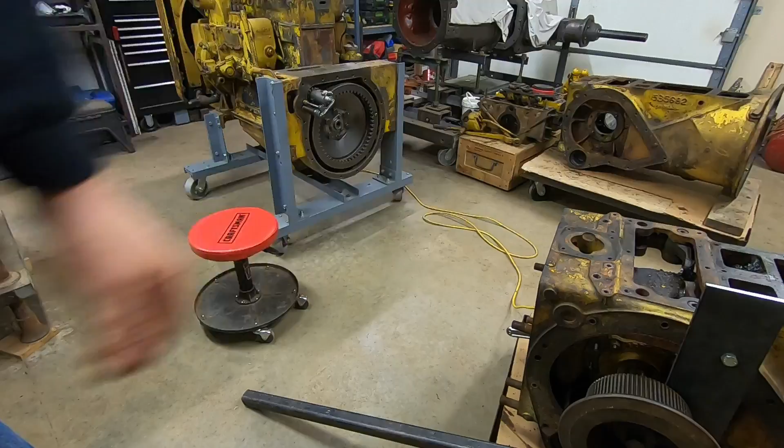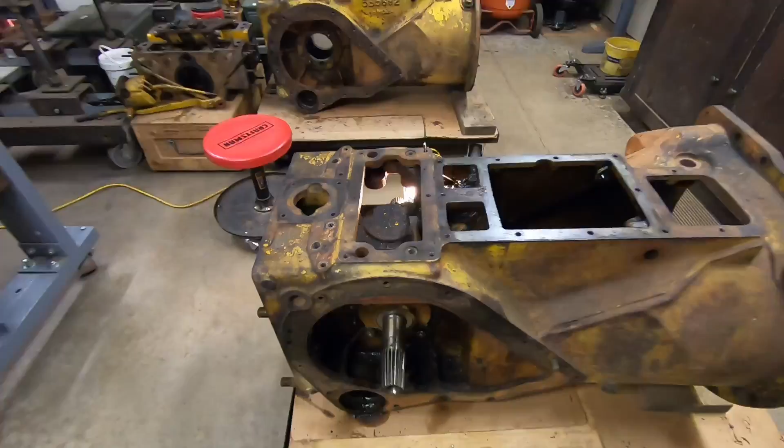Let's pull a bevel gear. So the first thing we have to do is loosen each bearing cap. So we've got 4 studs, 4 nuts, 4 fold over locks, times 2. Same setup on the other side. I couldn't have made that more perfect if I would have designed it myself.

And I've already taken the time to flatten all the lock tabs off camera, but honestly, props to the last person that was in here and did this assembly. Every one of these locks is positioned just perfectly with the tab up against a hard stop, preventing any counterclockwise rotation at all. That one's perfect. That one's as it should be. That one is exactly as it should be.

I almost feel bad taking this apart because it's just so right, you know. Oh, anyway, I'm rambling here. Seriously, it's like taking paint thinner to a canvas. Oh. All right, I'm over it.

All right, that's all of them. So what we want to do now is loosen up the bearing caps on both sides and get the shim packs out from under them. Just like we did with the bevel pinion, we want to get those shims out of there, make sure we don't damage them in any way.

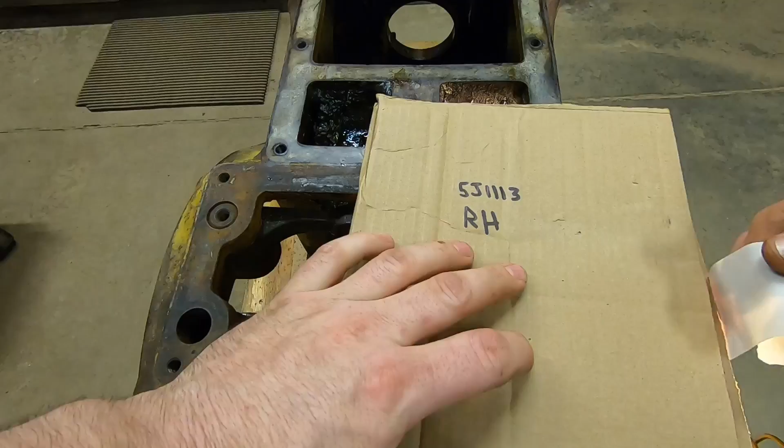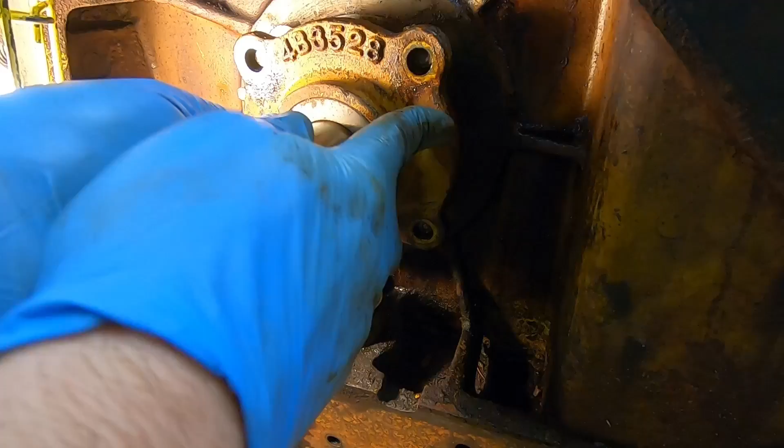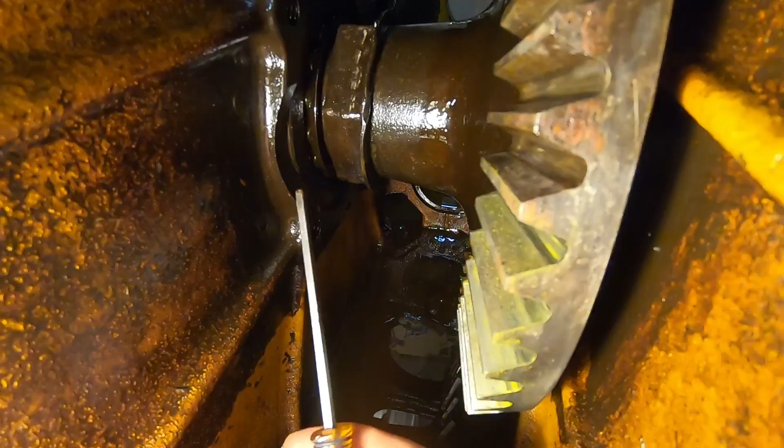So we put both bearing caps back on after pulling the shims. Why is that? Well, I still need to have this bevel gear shaft supported, but I didn't put them back on fully. I left a little bit of a gap behind this one because you want a fair amount of end play on that shaft for what comes next. And that is pulling this left side bearing.

So we have a bunch of things working against us here. Not only is it a press fit on the shaft, but it's flat up against the face of this nut. Now this nut has to come off the shaft, the lock has to come off the shaft, and the bevel gear has to be pressed off the shaft in this direction. So the only way we can get that bearing off without destroying it is to get a puller behind the inner race. And that's impossible to do with everything stacked up so tightly in there.

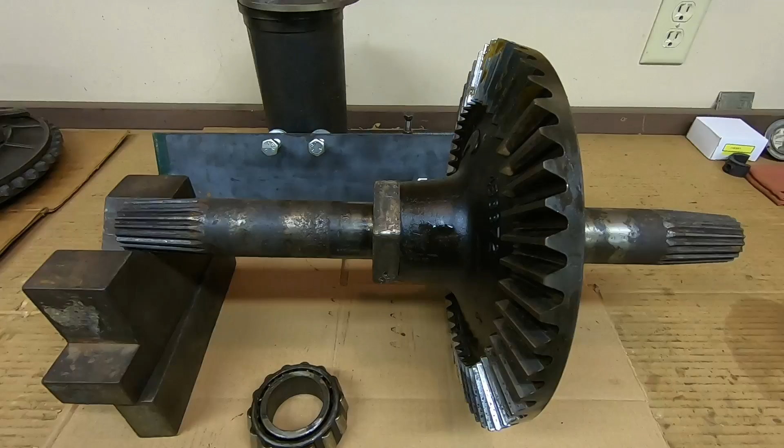So how do we solve that problem? My solution is sitting on the bench up there. This is the bevel gear and shaft that I pulled out of old 2115. So we have that bearing, like I said, pressed tight up against the face of this nut. So we need to get that nut loosened anyway to get the gear pulled off. So what I'm going to do is go in there and start backing this nut off.

And we're going to go 1 to 2 turns because we're going to use it to start pushing on this bearing. So as we start running that nut off, it's going to drift the bearing out somewhat. Once we get about 2 turns on it, I'll run it back in. And that should give us just enough of a gap in there to get a puller behind that bearing and slide it the rest of the way off that shaft.

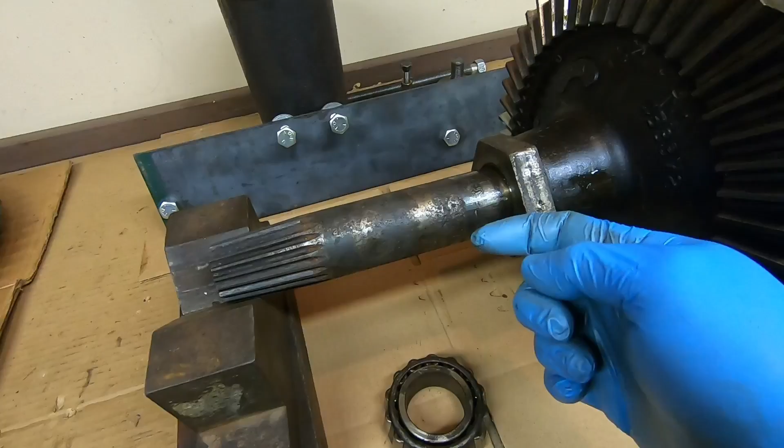Sounds simple enough, right? Well, unfortunately, that brings us to our next problem. And that is, how do you hold this shaft from turning while you're trying to loosen that nut and exert enough force on it to actually start pushing on this bearing? This is a 3-inch nut, and they're typically run on in excess of several hundred pound-feet of force. So, again, my next solution, we're going to use the steering clutch hub.

We have this nice splined end out here, and you don't want to just put a pipe wrench on those splines, but I've seen it happen. But we can just use the spline fit inside that hub to go on there and hold it. We don't have to reinvent the wheel here. Cat already built it for us. But we're going to need to use this too.

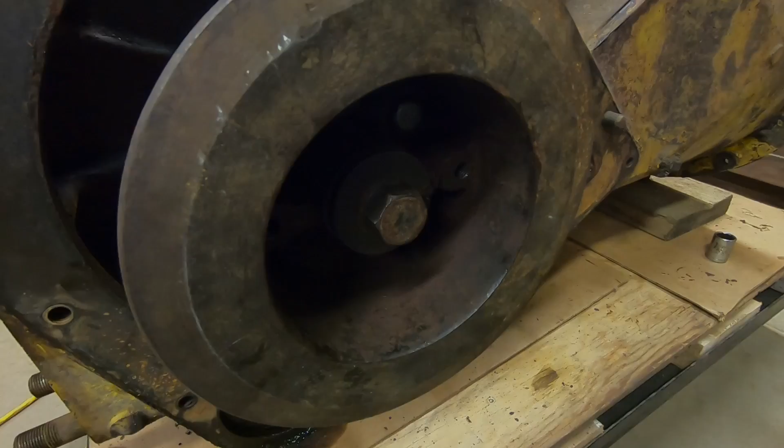Okay, so between the steering clutch hub, that flat piece of steel, and a few 1/2-inch bolts, we've essentially bolted that whole bevel gear shaft to the case. That thing's not going to move. We can do whatever we want to it now. So we're ready to loosen that nut.

Like I said, though, that's a 3-inch nut. And the trouble is, if you put a modern wrench on there, by the time you get up to like a 3-inch wrench, the head of that thing is going to be like 1.5 inches wide, and you've only got half of that to work with.

That's like 3/4 of an inch. You got that bearing right there. You have the tapered hub of the gear on the other side. That wrench isn't going to fit. So a cheap 3-inch wrench is like $200. An expensive one's like $500. And that's a little bit too much for me to buy just to grind half of the head off and then hope I don't spread it.

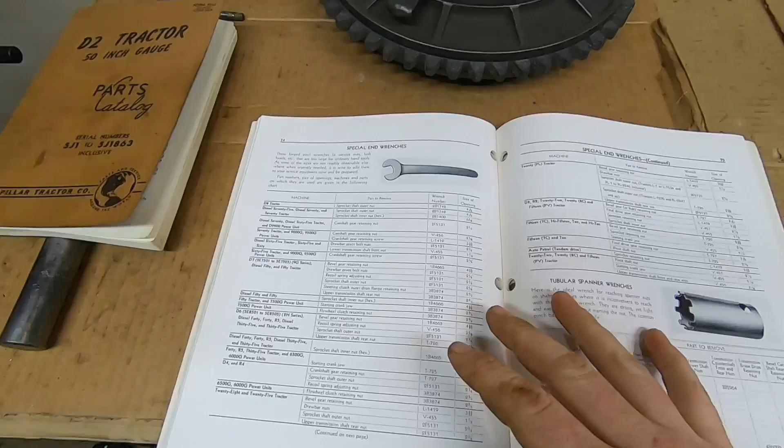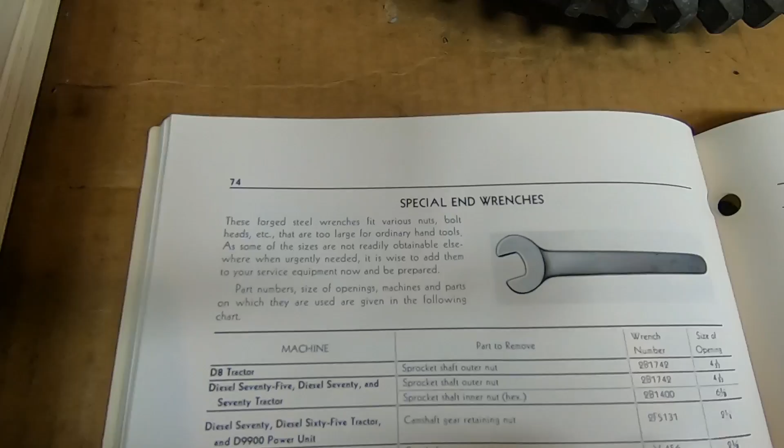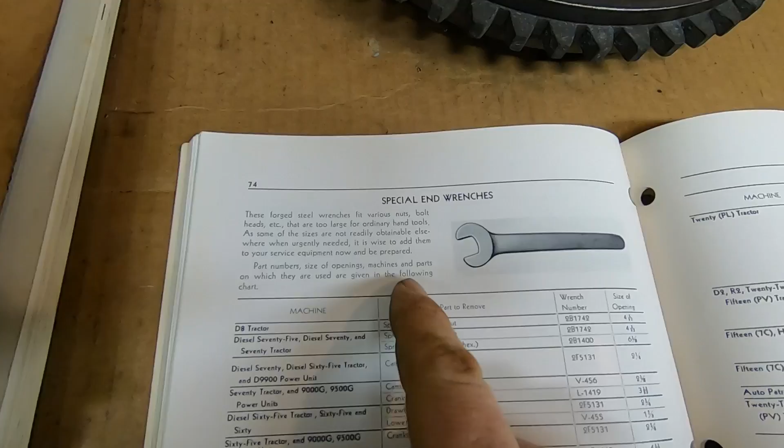So, well, we'll go back into the Caterpillar Service Tools book. I swear I shouldn't even buy books like this because for me it's just torment. They have a neat section here, special end wrenches. You can see the old style construction. We'll just read quickly here. These forged steel wrenches fit various nuts, bolt heads, etc. that are too large for ordinary hand tools. As some of the sizes are not readily obtainable elsewhere when urgently needed, tell me about it, it is wise to add them to your service equipment now and be prepared. Would if I could. Part numbers, size of openings, machines, and parts on which they are used are given in the following chart. Oh my God, I can just read through this stuff for hours, but we'll go over here.

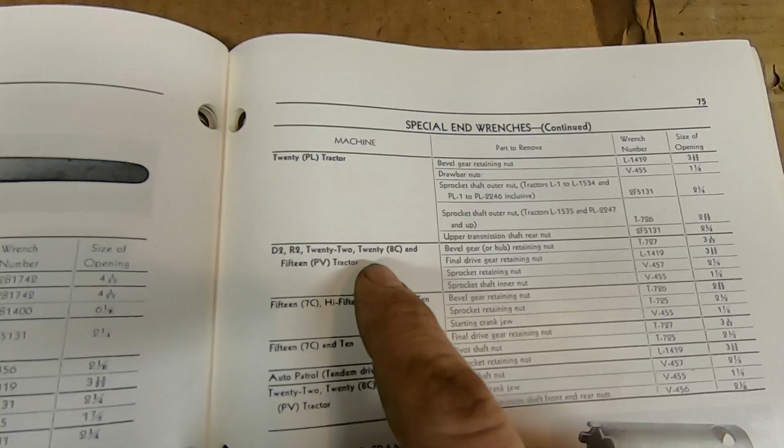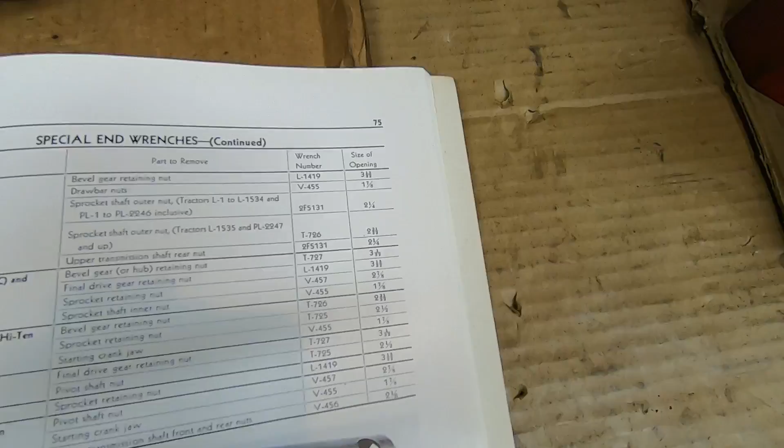You see D2, R2, 22, 8C20, and PV15 tractor, bevel gear or hub retaining nut, wrench number L-1419, size of opening 3 1/32. That's just another example of how life just isn't fair these days. If I could just go buy those things, I'd be like, I want one of those, I'm gonna buy 2 of those, until the list is done, I'd do it too. But so what do?

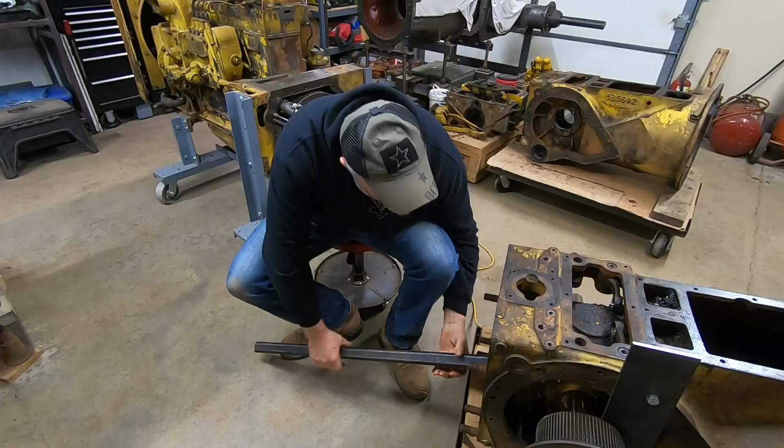Well, we can't fit a modern wrench on there, but the old monkey wrench will work. Look at this, just like it was made for it. Well, that's what we're doing. Did I also forget to mention that it may, small chance, involve the use of a 4-foot long cheater pipe as well? Tip away. Moves.

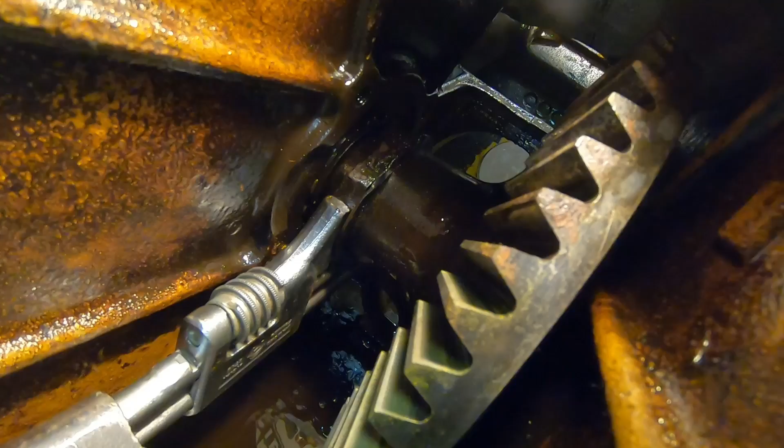Okay, the lock is loose, so we're moving things. From time to time, I'll loosen the bolts on my holding fixture, and I'll come around here and make sure I still got end play on that shaft. Good there. Reason being, you're drifting that bearing outward and taking up that end play, and you don't want to come out so far that you start binding heavily into that retainer. You'll break the ears off, so just something to be mindful of.

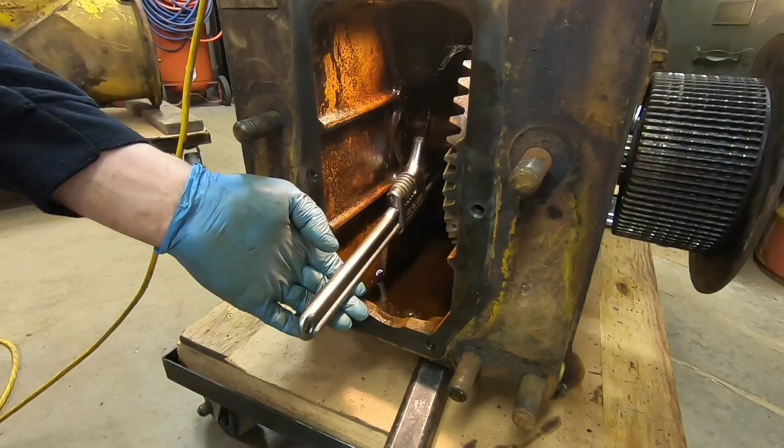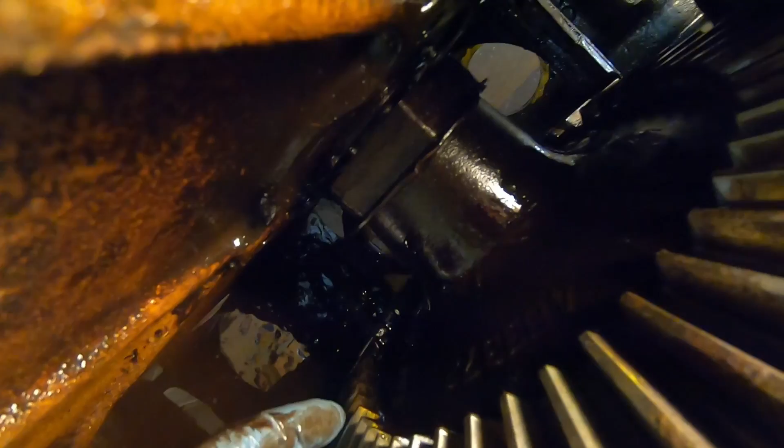Okay, I think I went far enough, so I'm just running the nut back to the gear. And I don't know if you can see, but we probably have a good 1/8 of an inch right there. Plenty of room to get behind that bearing with a puller, get it the rest of the way off that shaft. So I can take the holding tools off. And then we'll take the left side bearing cap back off. And we'll pull the whole bevel shaft as far this way as we can get it.

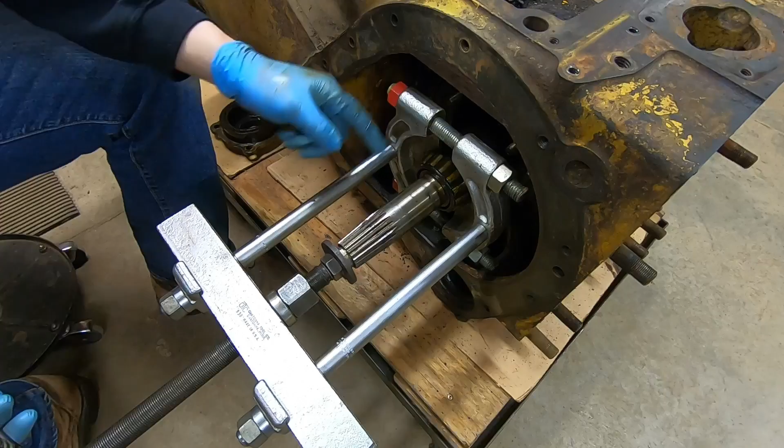So now finally, puller is behind the bearing, and I want to point out I got my handy little stop bolt that I made back in the end of that shaft. That's probably the most handy tool I've made in a long time. There's so many different things I use that for. But we'll get that bearing worked the rest of the way off of the step shoulder. There we got it.

Now we can finally get the nut off there, because I like to pull the old fold over lock out of there and have it right out of my way. You could probably leave that in when you pull the bevel gear, but I don't want to have that little tab getting in the way or getting mashed on anything or potentially dinging any of those threads.

So that old lock is taken out of the way, and we put the nut back on, because this bevel gear hub is a keyed tapered press fit, and we pull that with about the same amount of force that we pull these steering clutch hubs, probably even a little more. So the nut gets threaded back on just shy of the end of the hub, so that there's something to stop that gear when that taper fit, that press fit, finally releases. Okay, that'll be about right.

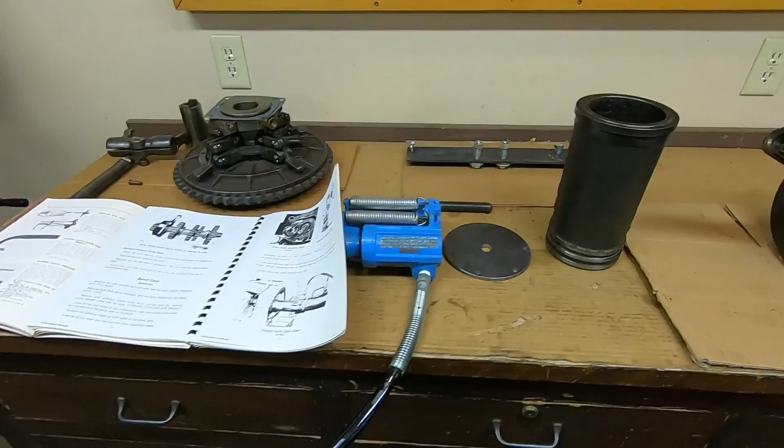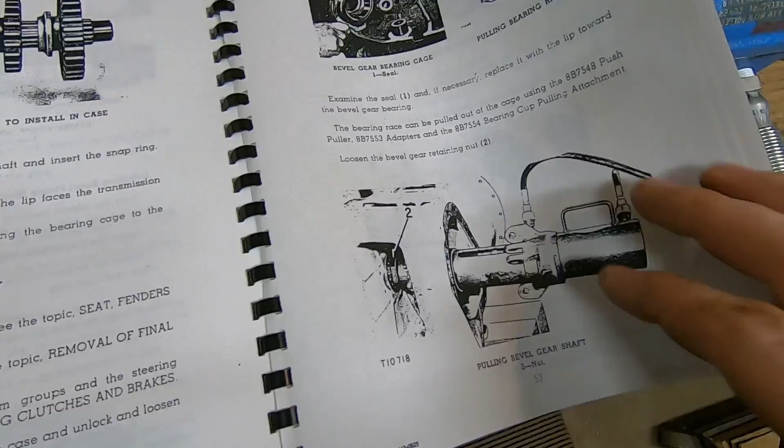All right, back to the right side again. Bearing cap is off, and we're finally ready to tool up to try and pull that bevel gear off the shaft. So we'll go to the bench once again. I'll show you my setup. And yeah, once again, I shouldn't even buy these books, because, oh man, they list all of the, look at that, the service press, the adapters, put right into that D2 case. They give you the full list of all the pieces you need.

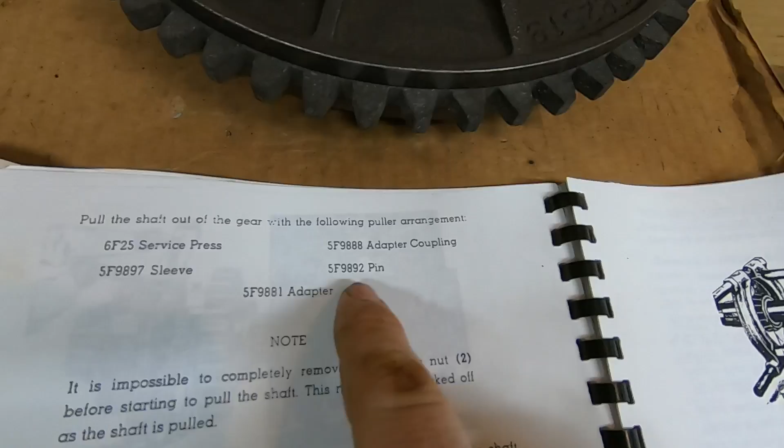The 6F25 service press, 5F9897 sleeve, 5F9888 adapter coupling, 5F9892 pin, and the 5F9881 adapter. Where did all these tools go? I've never been able to find them. Maybe one day, but we don't have any of that fancy stuff.

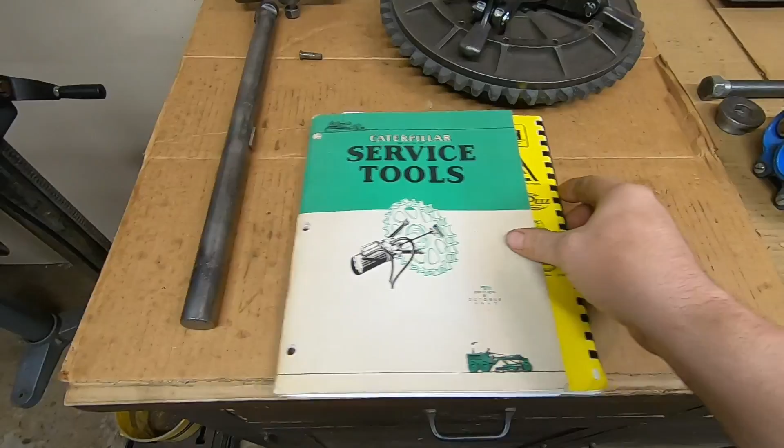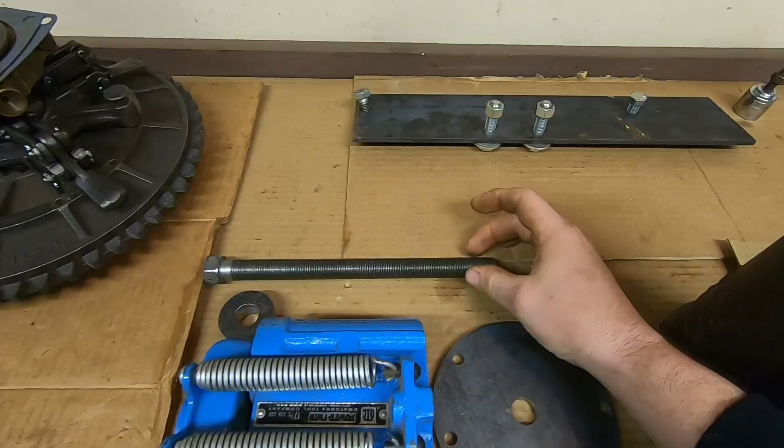But I got my little OTC ram, and we have our 3/8x16 forcing screw for the puller that grabs onto the end of that bevel gear shaft just perfectly. We have this adapter piece I made to go in the end of the ram. Forcing screw goes through there. We have a nice base plate for the ram. And our sleeve, well, it's literally a sleeve.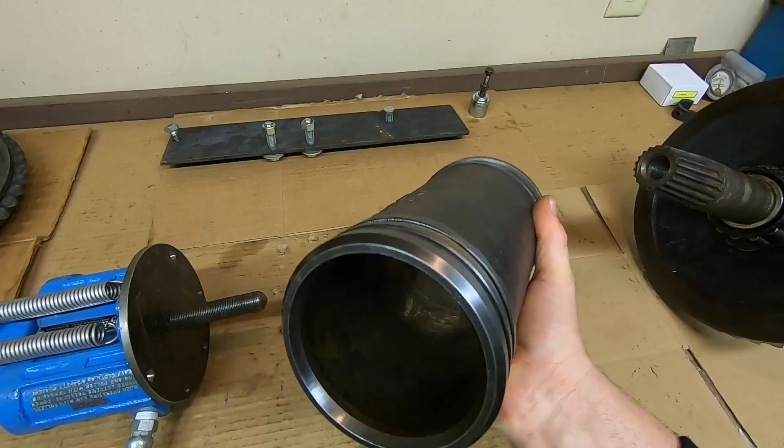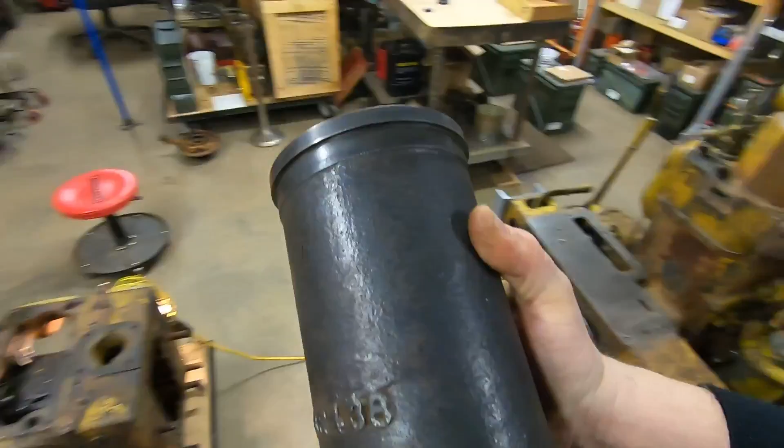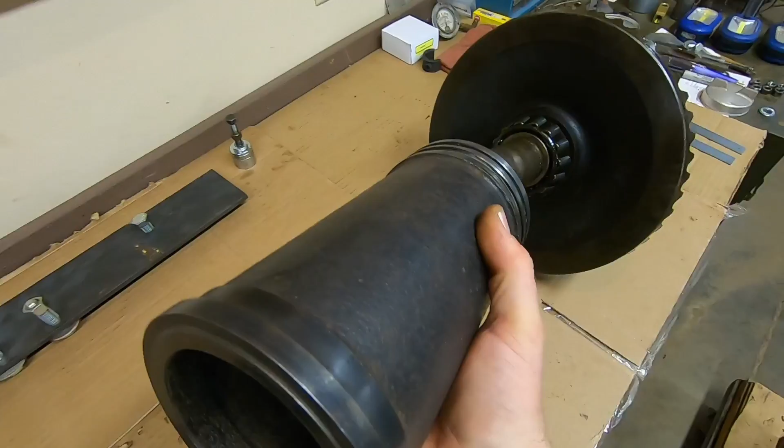So, call me crazy, but this is a D3400 cylinder liner. That's right. One of them that's right inside there. When you end up tearing down 4 engine blocks to finally find a good one for a certain Caterpillar D2 build, you kind of end up with a few of these laying around. So I took one of the rustiest, nastiest ones I had, and that lead-in chamfer at the bottom for the rings makes it a perfect fit on the back of that bevel gear. It fits the dish back there perfectly.

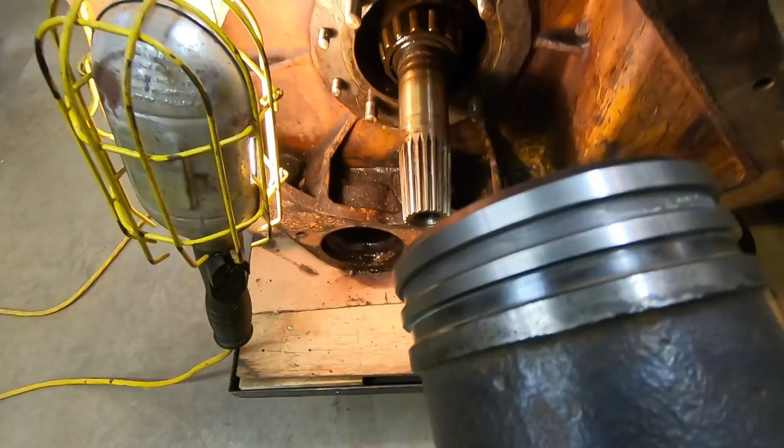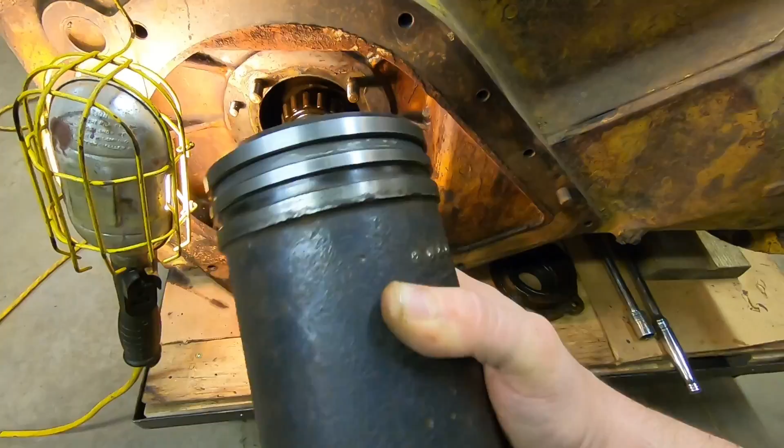It surrounds the bearing. It's plenty long enough to clear the end of the shaft, and the lower end where the liner seals are, in its original form, is a perfect slip fit inside that floor that the bevel gear shaft is sticking out of right now. I did put this in the lathe and took about 20 thousandths off the bottom. You can see where it's so shiny. That makes it a perfect pass-through fit instead of a slip fit that has to be perfectly aligned. Just makes it more user-friendly. It's a little redneck, I know, but that's what I use, man.

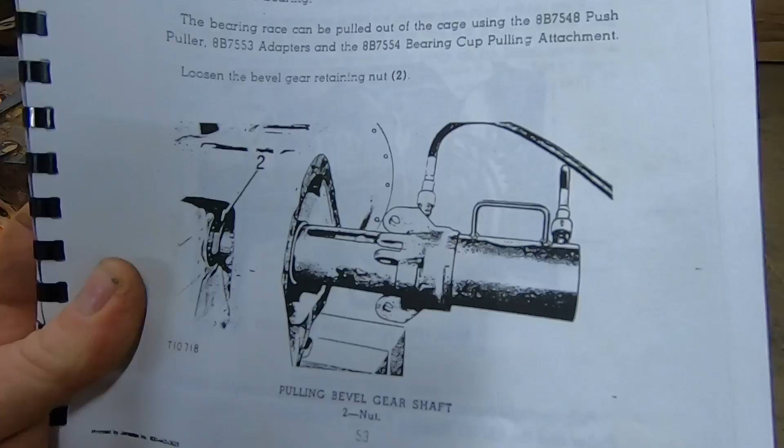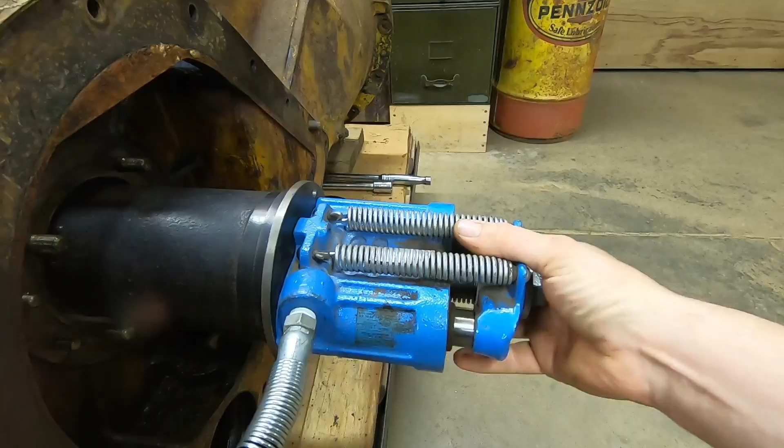Oh, that kind of looks like what's in the picture, if you squint a little bit and use your imagination. So, all right, we're ready to pull. I've got the liner up against the back of the gear. Forcing screw is run all the way into the shaft, just enough tension on it to keep the tool in line. We have the large nut just backed off the end of the hub, so when that releases from the taper, it will travel just far enough to loosen up. That nut will catch it. It will not allow anything to go exploding off the shaft.

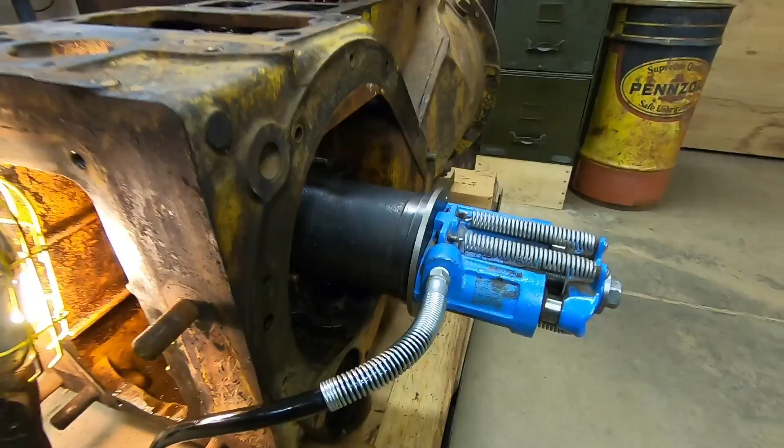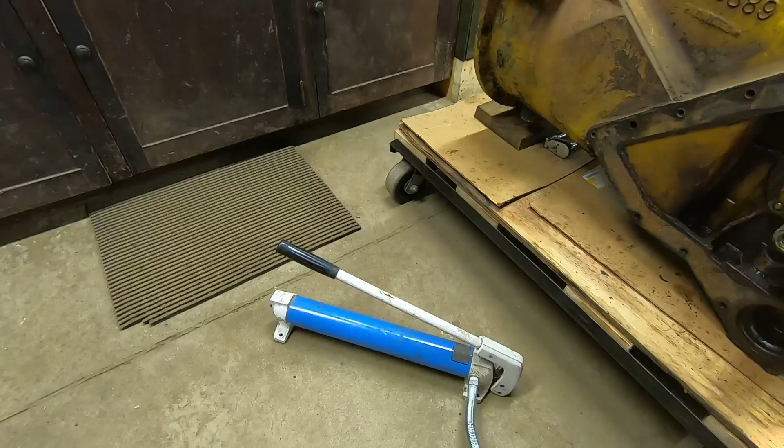So I'm going to leave you guys over here with the camera. I'll be on the other side dialing up the pressure, hiding behind the case, likely crouching low to the floor like a man. Sounds like we got it.

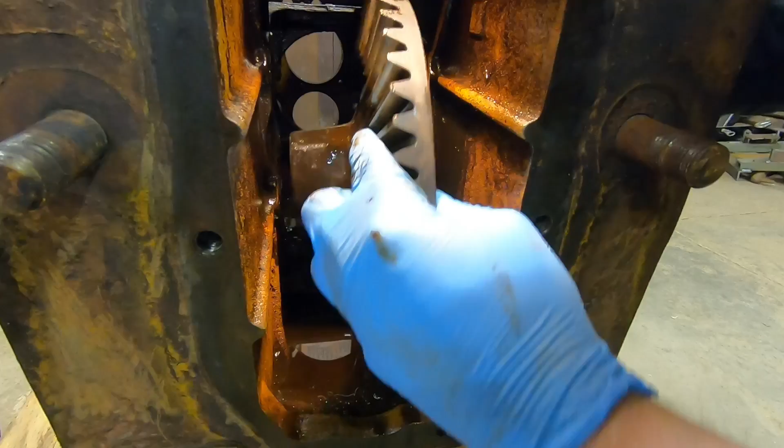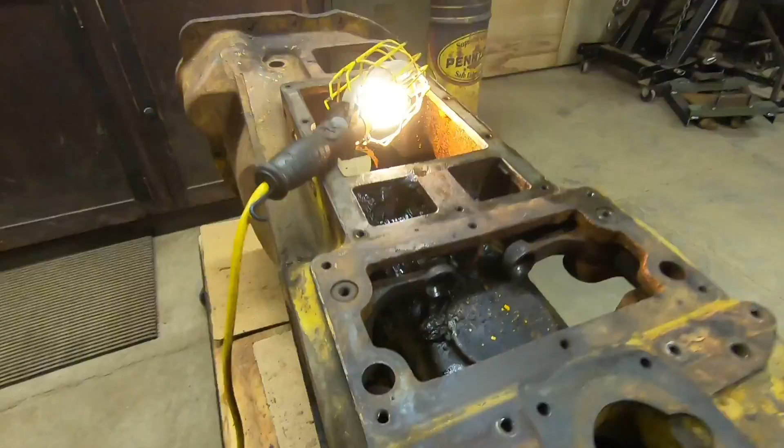Shaft is out. And now the gear. And that's all it takes. Okay, everybody, there's no more gears left in that case. They're all on the bench. So I'm going to do a lot of cleaning here, and we're going to assess.

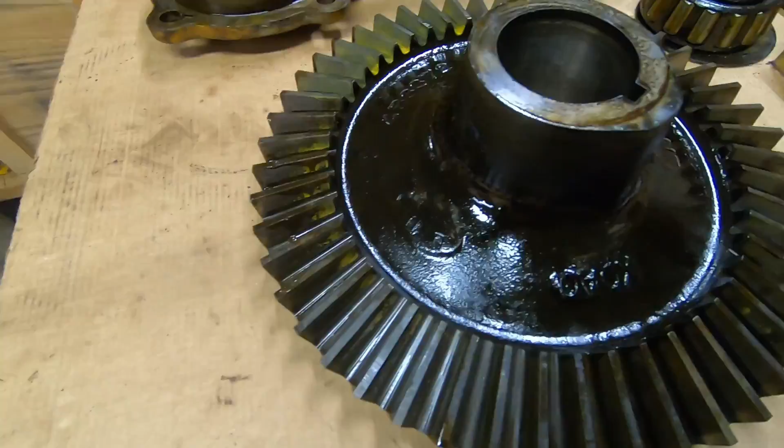And when we come back next time, we're going to talk about what my feelings are on these. I can tell you, I'm not loving it. I've seen teeth that are a lot better, but, like I said, there's a lot of cleanup left to be done there.

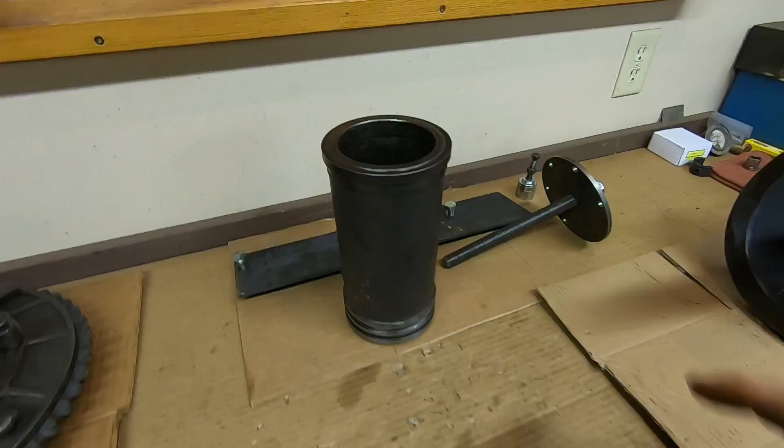I kind of like the way my liner works for a sleeve. It's got some heft to it. It's thick wall. I bet that's 5 or 6 pounds. So plenty of strength there, plenty of material. I don't even think that's the weak link of my system. So a couple more pieces left to take out of the case. Even though the gears are all gone, we're not quite done with that yet. We will address that next time as well.

Thanks for watching, everybody. That's how I pull a bevel gear and a shaft on a Caterpillar D2. That's kind of a lot of messing around, but for me, that is the easiest way I found to do it. So thank you for watching.